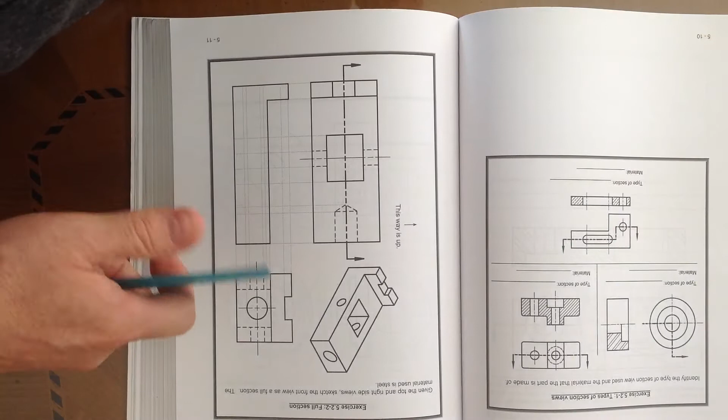The whole chapter goes through the process of creating section views. It has the basic information I'm going to provide for you today, but it's not a bad thing to review, so you always should go through the chapter. There are a bunch of different exercises, doing full, half sections, all those types of things.

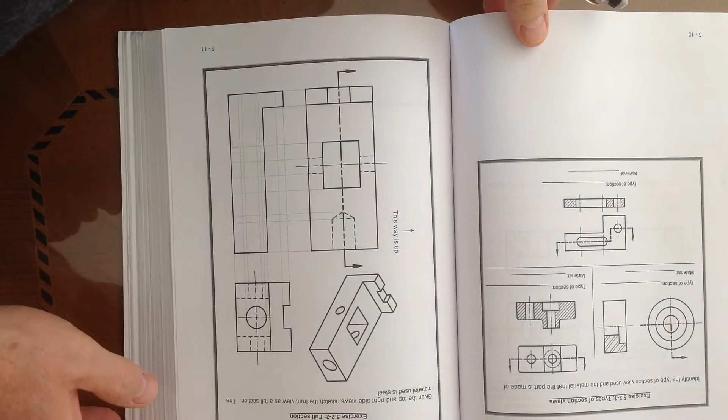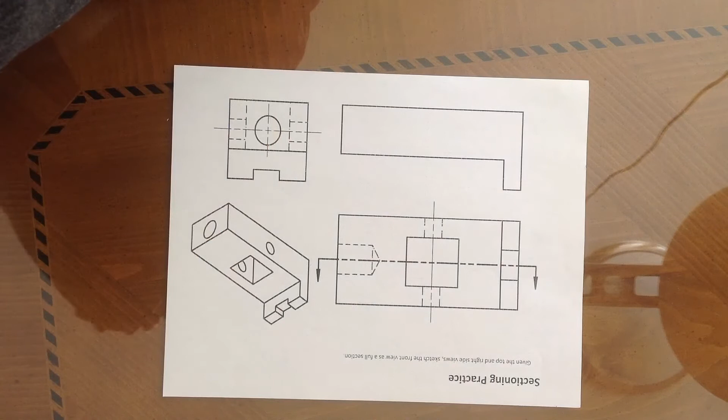But the one I'm going to work with you on today is exercise 5.2-2, full section of this object. I made a copy of this so I didn't have to take it out of my book. I also posted this activity on our Canvas page so you can print it if you don't have the textbook right at hand.

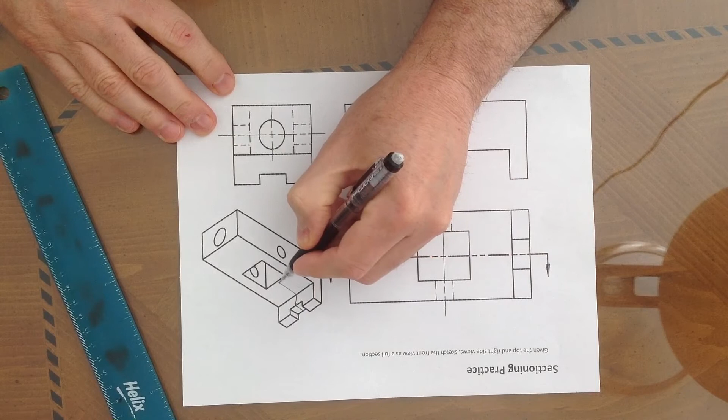So what they want you to do is basically draw the section view as the front view. Imagine the cutting plane is this line right here, cutting right through this entire object, almost cutting it directly in half. So it would come through like that, and this whole front half is gone. This section right here would be removed.

Now, they've given you the top view and the right side view, so you have all your measurements to work from. It's just a matter of projecting what you're going to see once you cut it.

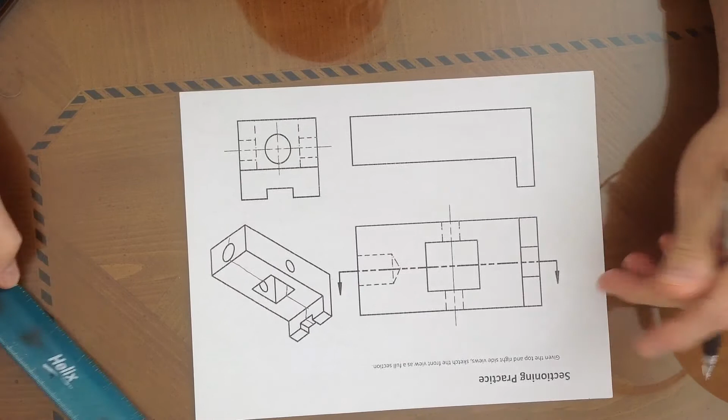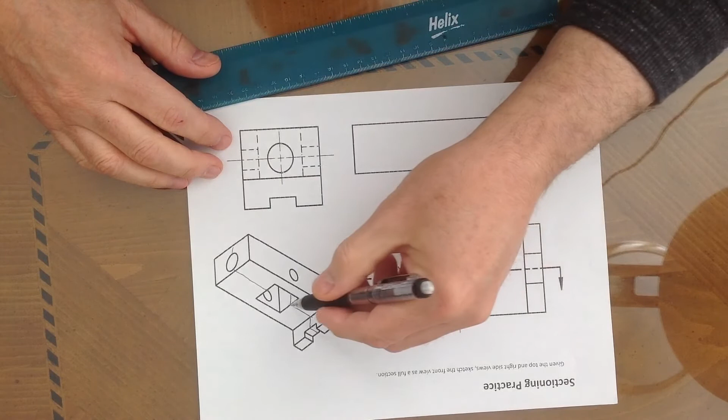I can see there's a little indent there, so I'd come over here and see that back half indent. This would be a solid line right here. And then as I'm looking at it from here, I would see this indent and the hole that goes through.

The nice thing is all your lines, the widths, heights, and depths, are all projected from either one view or the other. So I'm setting it up like so. It's going to cut right through here like this.

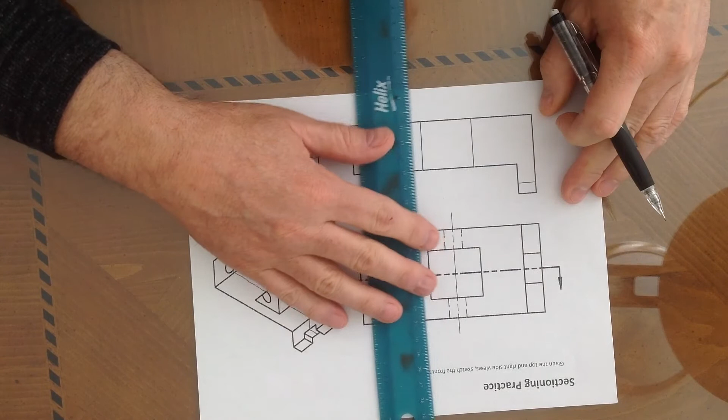Why is that a solid line? Because remember, this whole section is gone now. And then finally, I'm going to be seeing part of this hole that comes through here, so I'll utilize this as it comes through. How far does it come through? It comes through like so.

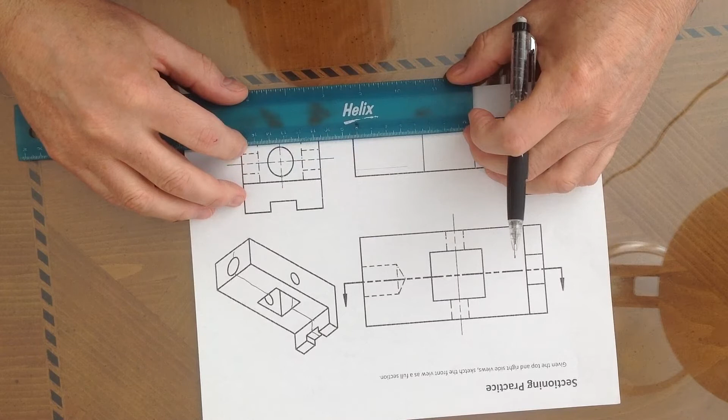There's the top, there's the bottom, and I'm trying to keep it nice and straight. Here is how far it comes into the object. And then you can see they call this a drill point—there's a drill point on it.

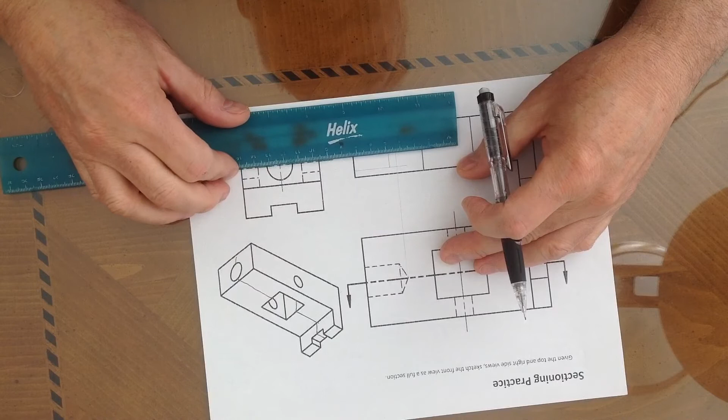How far does that drill point come out? Once again, I'm projecting that point out. Assuming this is the center right here, it comes to there, so I can start to create that drill point.

Erase this little piece right here, because—would you see that line? That's a good question. Actually, I think you would see that line in a section view.

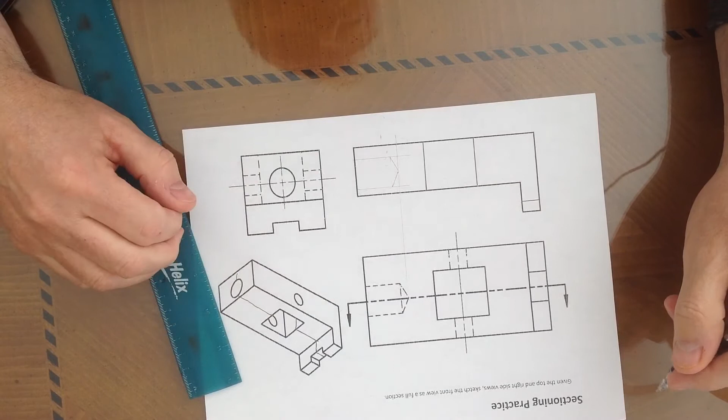Now we're not done yet, because I can still see that hole on the other side. So to mark out that hole, I have these hidden lines that I can follow. Here we go, hidden lines—I'm just projecting the top and the bottom of that hole.

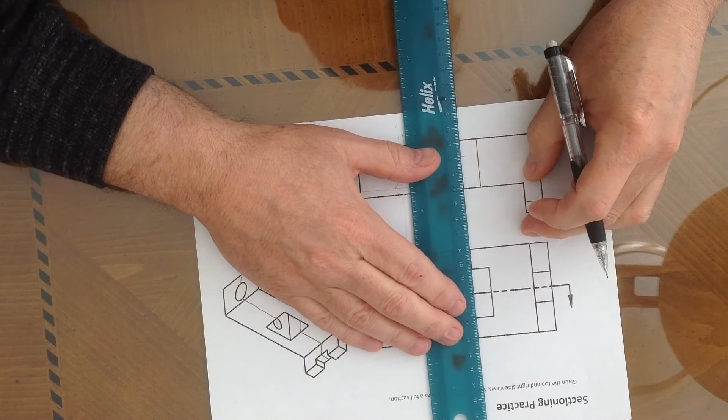Here's the width of the hole, looking at it from this view. Notice I'm using all these light construction or projection lines to create the size of this hole.

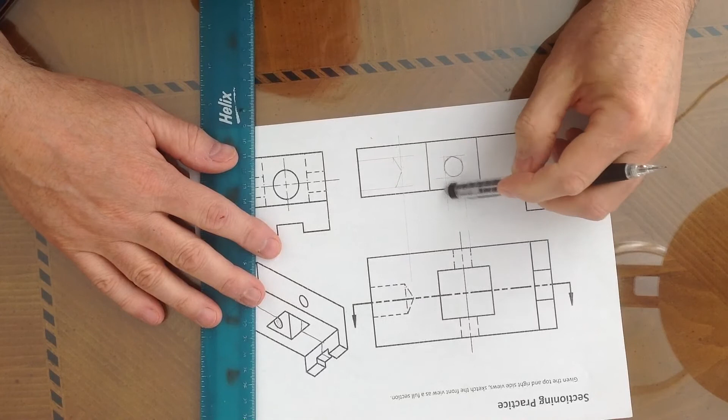So with that, boom, boom, boom, everything else is the material that's getting cut away. I have a circle here, and once you have a square there, it makes it easier to create the circle. I'm not marking whether you have a perfect circle or not, but that's what you're going to see. Clean up those things, like so.

Then it's just a matter of putting in the section lines. As we explained in the presentation, the section lines are diagonal lines, and typically they're just about an eighth of an inch apart.

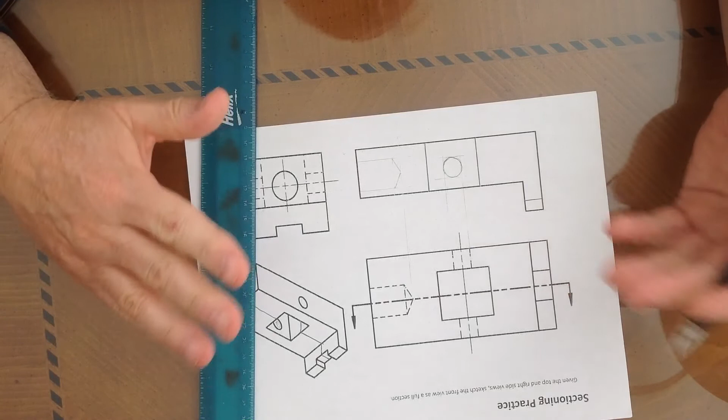Do you measure them? Well, I don't typically measure them. I would just set it up, start in the corner, and try to keep them as parallel and as even as I possibly can all the way through, keeping that consistent.

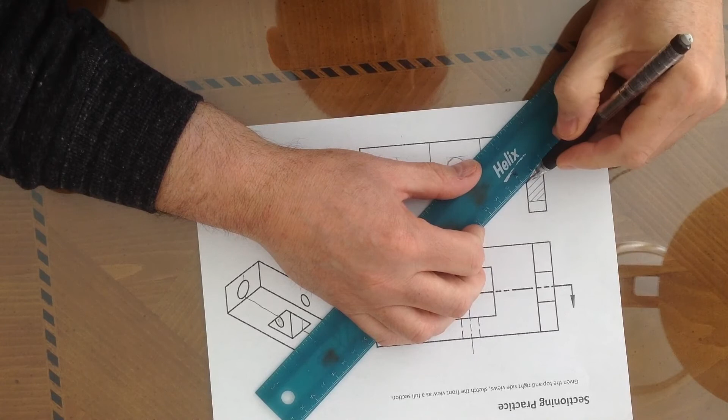Typically 30, 45, or a 60-degree angle, and you can see these section lines.

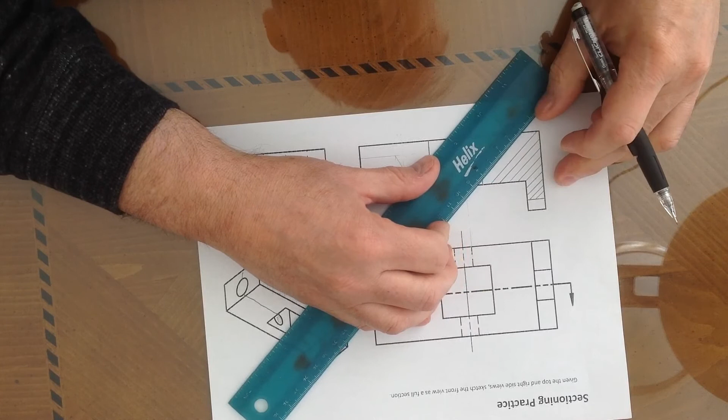Now remember, different section lines can determine different types of material. This is just a general section line—you can't determine the material from this particular one. But you're going to draw section lines right across this entire object. It doesn't matter if the section lines go this way or the other way, it doesn't make any difference. It's all about what you want to do and how you want to set it up.

So I want you to go through and finish off your section lines. I'm going to go all the way through. Now, are there section lines in this area? No, there wouldn't be, because as you can see, we cut away there. There would be section lines up to there and all the way around the hole, and that would be the end of it.